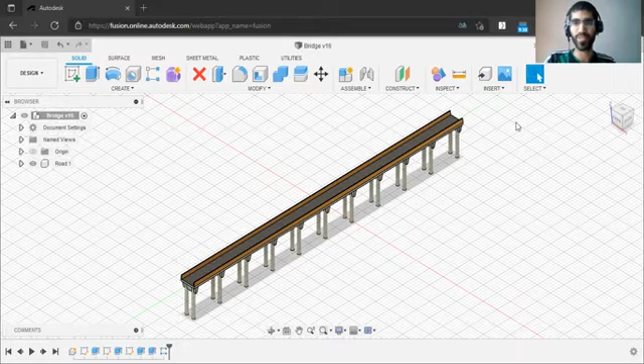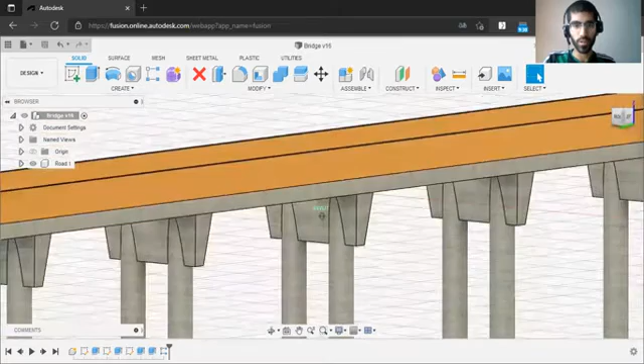So in the first iteration here, all that I did was just randomly guesstimate where do I put the supports, which dimensions do I need. So here we have a 100-meter long section of the bridge, and in the middle we have some asphalt, and around that some iron railings, and at the bottom we have just some concrete pillars to hold everything up. And now we just randomly estimated how many we need. I was hoping that it would be enough.

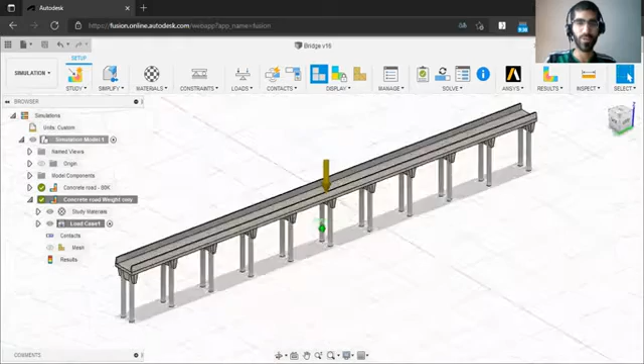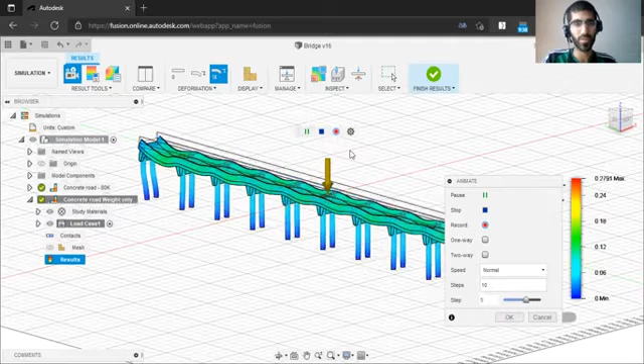So I went over to simulate what would happen when I just checked, does this bridge hold up its weight? Just the weight, no added loads on top. Can it handle all the pressure? And so when I looked at the results, well, you can see that doesn't look great. It looks like a Hot Wheels track here. And I can try to animate, but there's no real meaning to the animation right now because it's just deforming amidst the weight. So it's not like there's some added pressure. It's just like this would naturally happen when the bridge were actually in service.

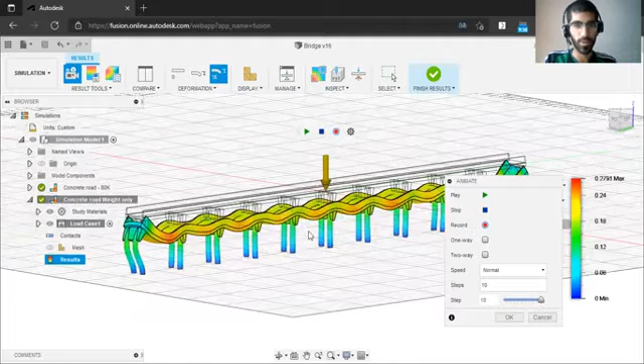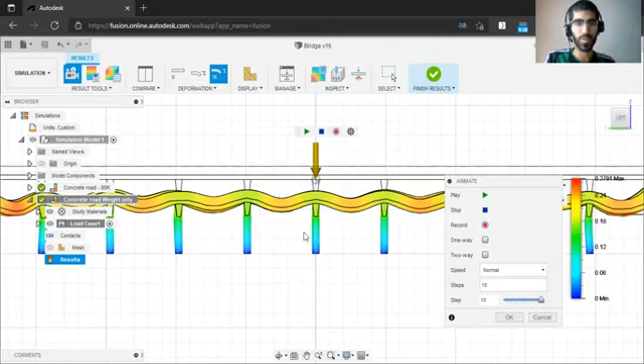So what I need to do now is one, probably update the size of these different columns. So make these support columns larger. And then two, probably add some supports to these middle regions. I'm thinking some triangular beams so that it's better supported. But hey, at the very least, currently it looks like we have some artistic pieces here. Looks like interesting art going on, but not a great bridge. So let's go on to the next iteration.

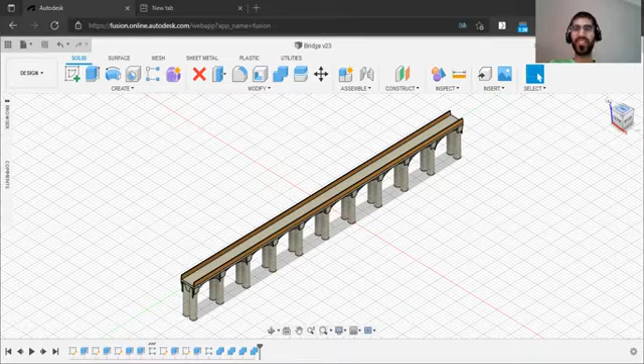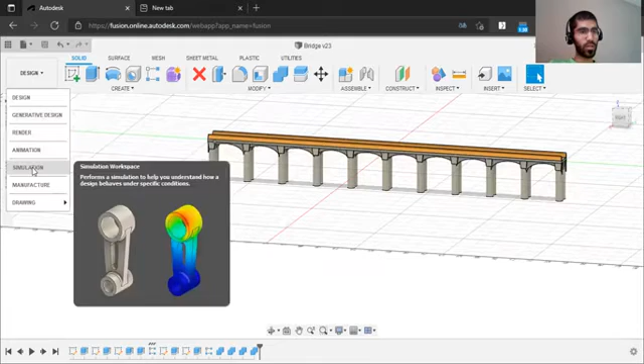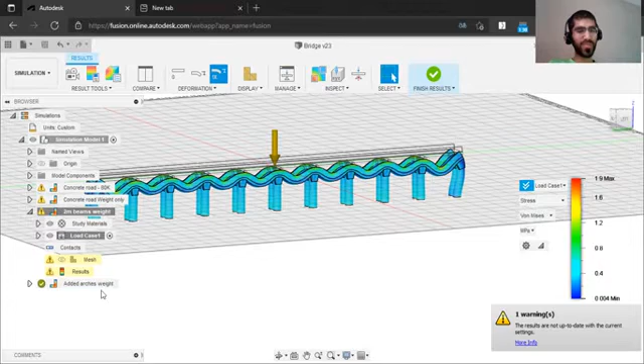So we now have the second iteration of the bridge, and as you can see, I have added these little arches in the middle of the columns so that the weight from these middle sections is more evenly distributed across the columns. And so when we go over to the simulation to test whether this works, well, it does and it doesn't. You can see the bridge still looks a little bit like it came out of Dr. Seuss, and it still looks a bit topsy-turvy. However, when we compare it to the results of other bridges, well, the other one looks even more like a roller coaster. So making some progress.

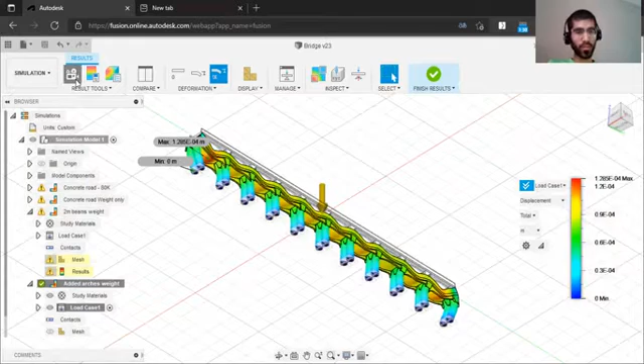I think one of the things that is going wrong here is I'm not setting up my study correctly, because when I animate these results, it really does look like the bridge is falling down. And I'm just like, what? How is that area contracting? That does not make sense to me. That's quite bizarre. So when I set up these studies, you can see these little locks. These are things that I say cannot move. And I thought if I just said the bottom of the bridge cannot move, well, that should also propagate its way up to the top of the bridge.

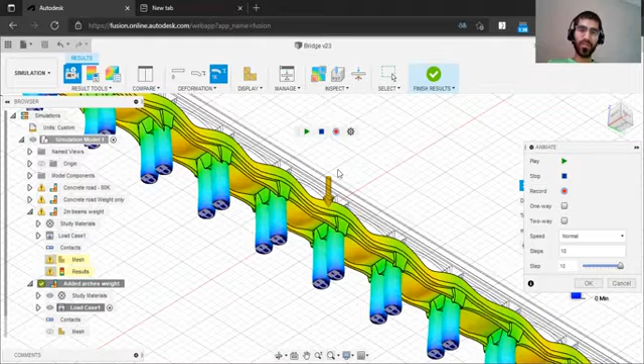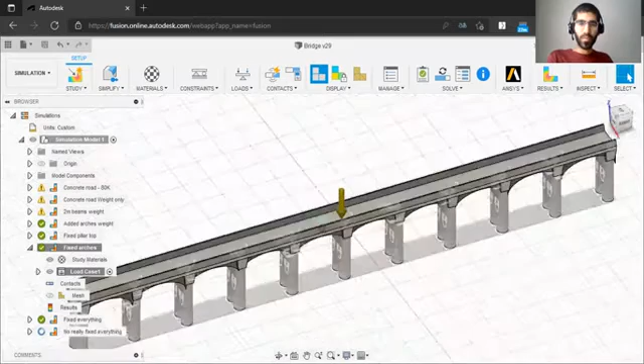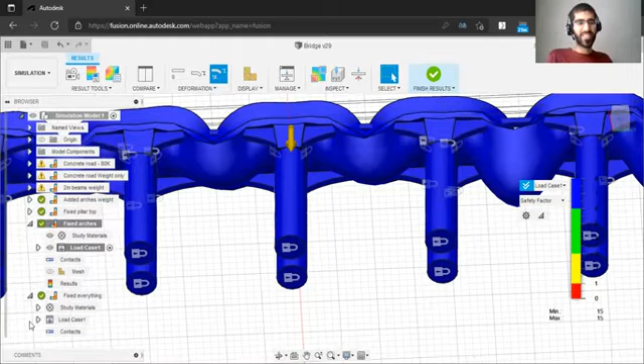But I'm going to try running a simulation where I change what are called the constraints so that maybe we can avoid this issue. So regarding the study setup, I think I figured out what the problem is, and it's taken quite a few studies of experimentation to get there. If I look at the results, it seems like no matter which things I fix, which things I say cannot move, there's always these little bulges happening in the road surface right here. And when I try to even just fix things that don't even make sense to fix, this still happens. The road surface just doesn't work, which was very frustrating to me.

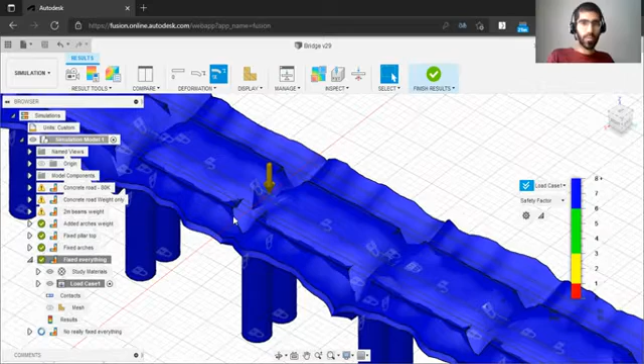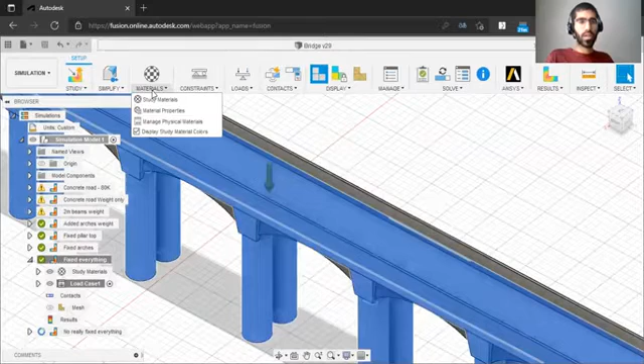But then I thought a little bit more about why that could be happening. When I look at the materials that I used, the surface of the road is made out of stone. It shouldn't be that flexible. And I'm not sure why Fusion 360 might treat stone like that, but I just cannot make a realistic physics simulation if it does treat stone in this way. And I'm not sure what to do about that.

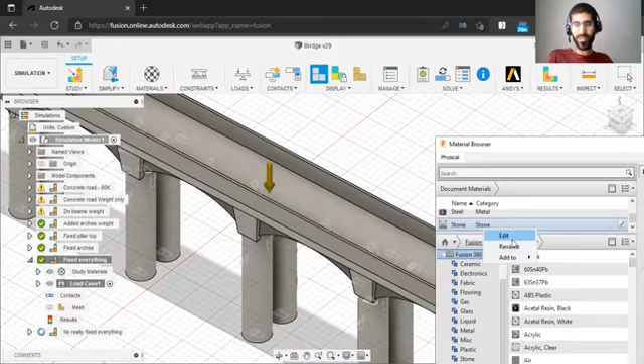So what I'm going to do is I'm just going to try and make sure that nothing at all can move. Like literally everything is fixed, every single face and point. And that's not very realistic in a bridge, but I'm not sure what else to do because, Fusion 360, I don't understand your material properties going on here.

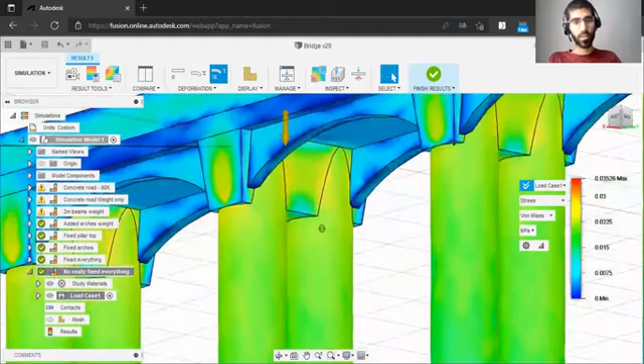So I have the first results, and it's actually the first valid result. So you can see here that the stress tends to build up around these support areas at the bottom, which makes sense. The columns are bearing the weight, but it's not a lot of stress at all. 0.03 megapascals, that's a unit of how much force there is on a given area.

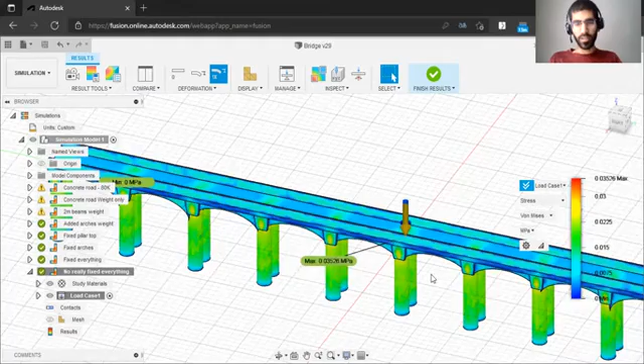So in this load case, that's just the case that I've made for the bridge in terms of how much weight it should support, I've put in about 50 cars worth of pressure on top of the bridge. So it's a 100-meter bridge. I figured, hey, there's not going to be cars that are less than 2 meters long. So you literally cannot fit more than 50 cars, and it appears to be just fine for 50 cars worth. I could probably take out a bunch of these columns here and still be fine.

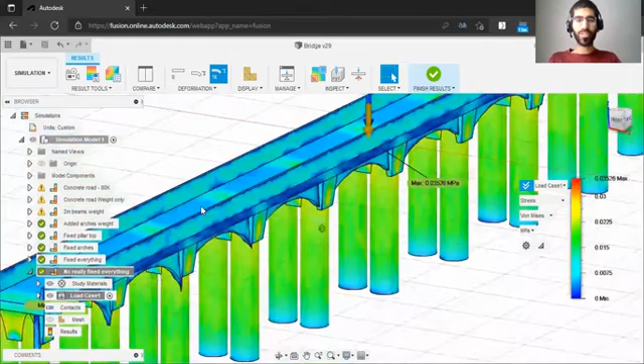So all in all, we have made a bridge successfully. It's not a great bridge. It's not a great study because there are some assumptions being made that I am not particularly fond of. However, it's cool to see the results, and it's cool to learn a little bit more about which factors I have to think carefully about when making these kinds of studies. And thank Lord that I'm going to engineering school, so I don't just play around with the constraints to see what works, and instead actually know a little bit more of the theory. So I'll look forward to revisiting stuff like this in the future.